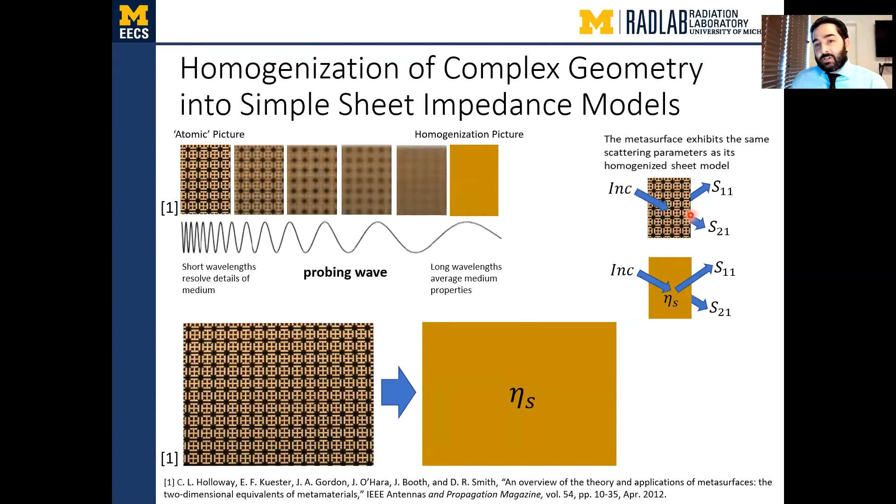So the key to that is that the patterned surface and the homogenized sheet share the same S parameters. So what do those S parameters look like? How do you go back and forth from the sheet parameters and the S parameters themselves? Well, in general, if you have a bi-anisotropic sheet boundary, it can support both electric and magnetic currents, and both the electric and magnetic field can excite electric and magnetic currents.

That's described by this matrix equation here, this boundary condition in general. So to get to S parameters from your sheet parameters, which include the electrical admittance, you have the magnetoelectric and electromagnetic coupling terms, and the magnetic impedance. From those terms to the S parameters, you use this equation here. And if you need to go to the material parameters from the S parameters, you can use this equation down here. These equations are for the general case of infinite homogeneous bi-anisotropic sheet boundaries, which are assumed to be infinitely thin.

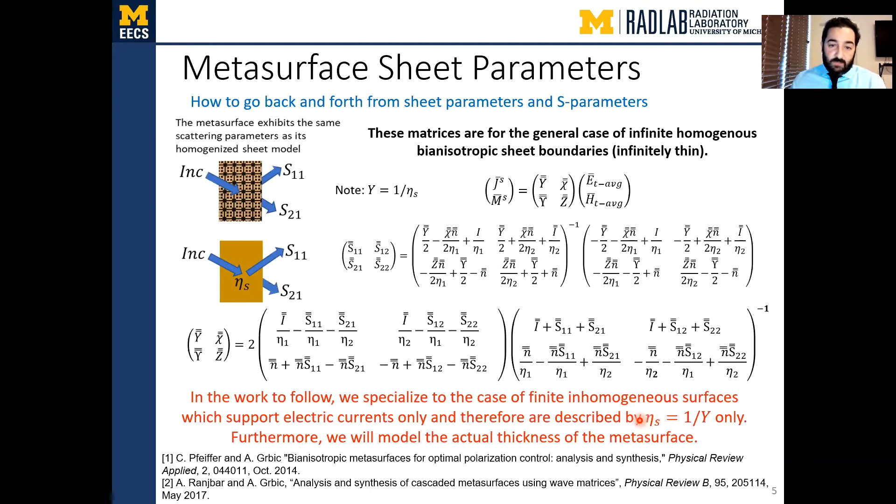In this work, what we're going to do is specialize to the case of a finite inhomogeneous surface, and we're also going to further specialize it to ones that support electric currents only, and therefore can be described by a single parameter, which is this admittance matrix. The inverse of that admittance matrix we're going to call the electric impedance. Furthermore, we will model the actual thickness of the metasurface itself.

So how do we do that? If we're only supporting electric currents, then our boundary condition here collapses into a single equation, the impedance boundary condition. We're only supporting electric currents, and we only have electric fields that excite those electric currents. Therefore, we can describe the metasurface through a single parameter called the admittance matrix, or the impedance matrix if we take the inverse of it.

So our metasurfaces in the beginning of the work will be two-dimensional in the sense that they do not vary in and out of the page. This metasurface here is a patterned metallic cladding over a single dielectric spacer and a grounded dielectric, or rather, the ground plane underneath. That geometry does not vary in and out of the page.

So we're going to do exactly what we just mentioned. We're going to take each of these patterned cladding elements, and we're going to homogenize them and assign to them a single impedance, which is representative of the average response that element would provide. That is called homogenization.

So once we have a homogenized sheet, which is basically an array of homogeneous impedance sheets, we can use this boundary condition to describe its response to a given electric field, or the currents that are excited by a given electric field through its impedance.

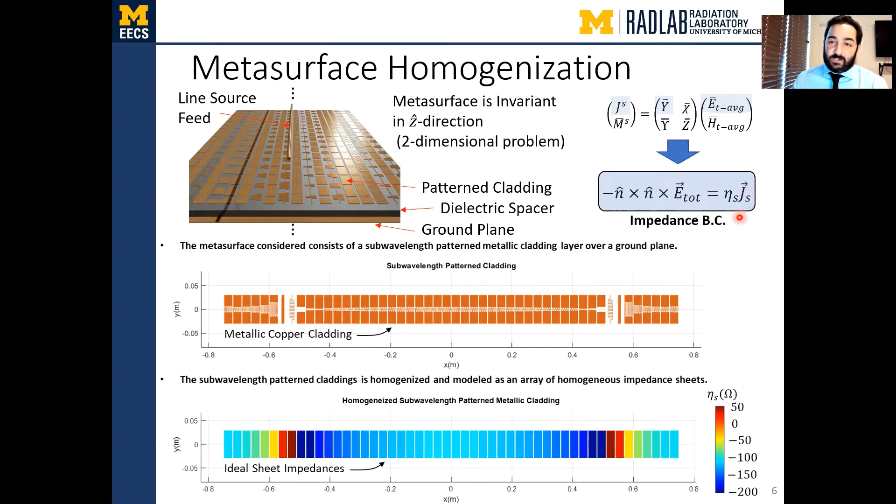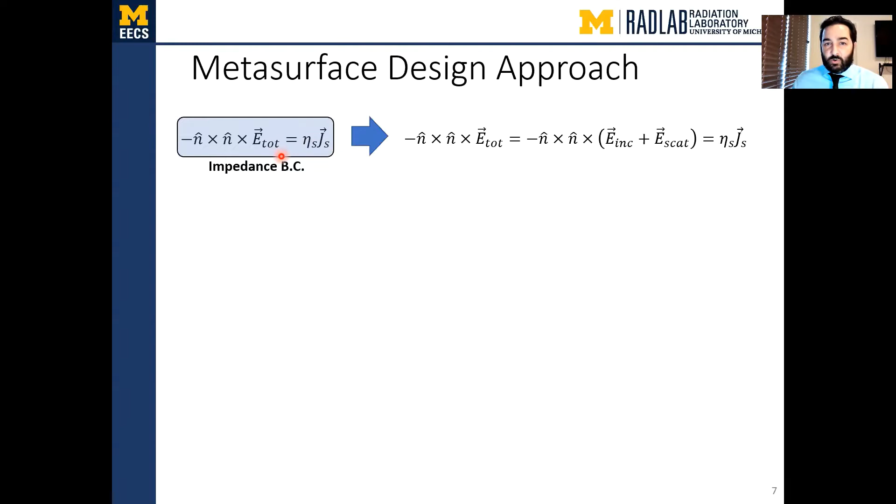So how are we going to design it given this boundary condition? Well, we're going to construct an integral equation around this boundary condition. So if we split the total field into incident and scattered, we can write the following equations.

So we can stipulate the desired scattered electric field. Typically, we know the incident field because we're going to excite the surface that we're trying to engineer the response of, and the scattered field is what we want to provide or produce. So we can specify the scattered field and stipulate it. If we stipulate the scattered field and we know the incident field, then we know the total field. That means we know the left-hand side.

Step 2: we're going to express the scattered field in terms of surface currents through an integral equation. So we're going to express the scattered field in terms of the integral equation shown here, which is the convolution of the Green's function with the current density.

Step 3, we're going to solve for those currents which satisfy the equality using the method of moments paradigm. We'll expand the unknown current density in terms of known basis functions underneath the integral sign, and recast this integral equation into a matrix equation, solve that matrix equation, and obtain the unknown currents.

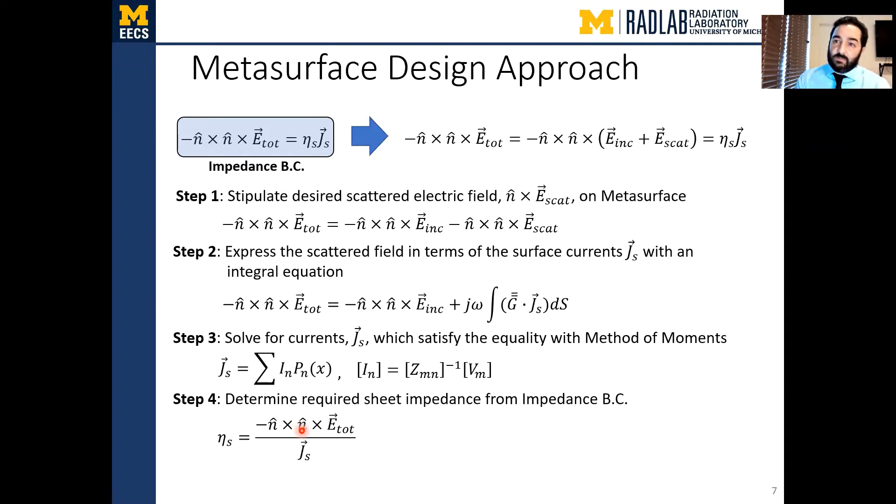Step 4, we'll return to this impedance boundary condition once we know the currents and the desired total field that we stipulated the scattered field component of, and we can solve for the sheet impedance that's required to achieve the transformation that's desired. So we'll outline the 4 steps in the following slides.

Step 1, we said we have to determine the desired total field. As I was alluding to, we know the incident field, its magnitude and phase, if we write it in polar form. And we stipulate the scattered field phase. We want to collimate the beam, let's say. But we don't know the amplitude.

The way we can find the amplitude is we can attempt to satisfy local power density conservation at the surface. So what we do is we set the incident power density equal to the negative of the scattered power density locally at each point along the surface. What we're trying to do there is say that the power that comes into the metasurface locally at each point is therefore reflected, and the hope is that we would get a passive metasurface in doing that.

So that's how we come up with the amplitude. We satisfy local power density conservation at each point along the metasurface, and we can derive a formula to give us the unknown amplitude. So we stipulate the phase, we derive the amplitude based on conservation of power, and then we have our desired total field, which is one key step in designing metasurfaces.

In step 2, we formulate the integral equation. Now we know the left-hand side, and we're going to formulate an integral equation around it. So we split the total field into incident and scattered, and then we throw the scattered field term to the right-hand side, and we construct an integral equation out of that. We express the scattered field in terms of an integral of the Green's function and the current density.

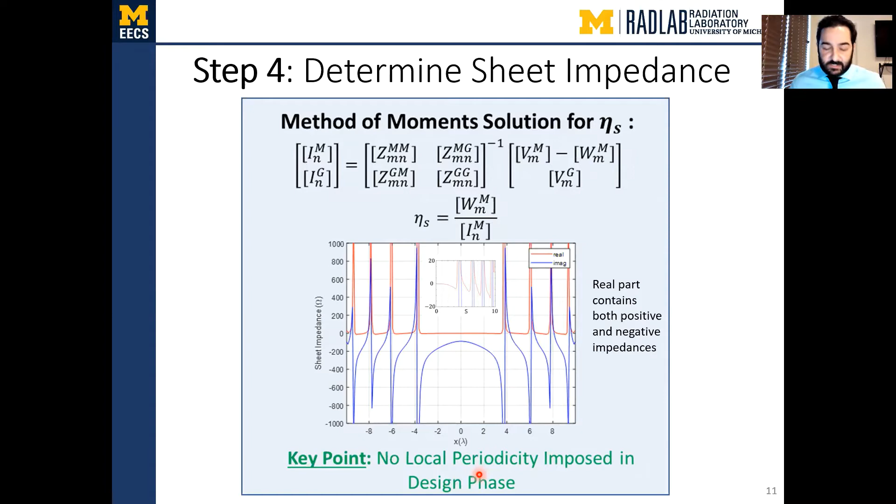So one key point here, though, is we did not assume local periodicity anywhere in the design phase, which is sometimes common in reflect array designs and things. We did the full coupling matrix between all the elements.

So for example, if we have a 20 lambda wide metasurface, which is separated from the ground plane by lambda by 10, and we feed it with a line source, in and out of the page, which is 10 lambda up, at 1 gigahertz, we get the following results.

So we have the incident field, which is a cylindrical wave coming from the line source, and we want that cylindrical wave to transform to a perfect plane wave. So we design this metasurface, which will have this sheet impedance shown in this figure. If we pattern this metasurface such that it can exhibit this complex sheet impedance, then we would get exactly the scattered field phase of a plane wave. We get a scattered plane wave, and that's the idea.

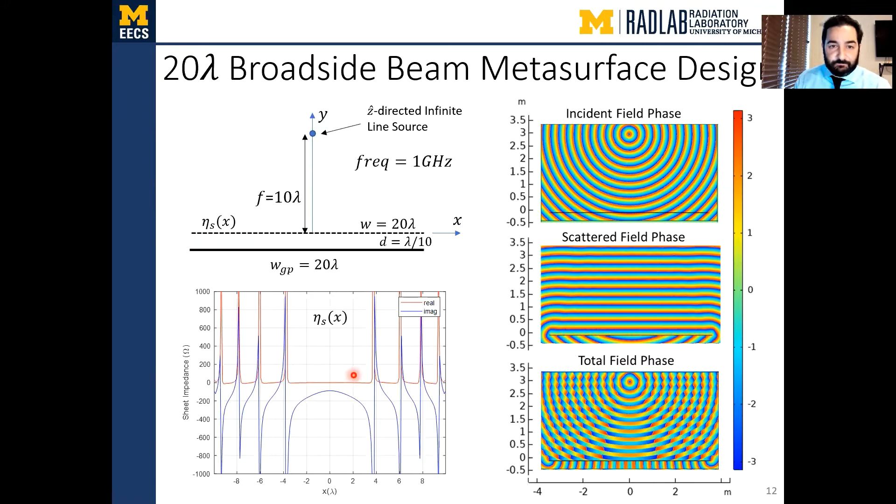But the problem is that the sheet impedance required is complex. So we have to find a way to, well, first we have to understand why it's complex. Where did the real part come from?

So we revisit step one to determine the desired total field. In that step, we said that the total field is the incident plus the scattered, and we knew the incident field by knowing what source we're using, and we stipulated the scattered field phase, and we didn't know the scattered field amplitude. We tried to do conservation of local power density at each point on the surface in order to find this amplitude.

If we expand the power density along the surface, then we can calculate that as one half real part of E cross H conjugate, and we know that both fields exist on the metasurface simultaneously, the incident and the scattered field. If you expand this cross product, you will get three terms.

You'll get the power density associated with the incident field, you'll get the power density associated with the scattered field, and you'll get this other term with the cross products, the mixing terms, which is due to the interference of the incident and the scattered field. So you have E incident cross H scattered conjugate and E scattered cross H incident conjugate.

So what does that look like? We know by design that the incident power density is equal to the negative of the scattered power density, so both these cancel by design. That's how we found the amplitude. We found this amplitude such that it generates a scattered power density equal to the negative of the incident. So these two cancel by design.

This term is left over. And the whole idea is to set this equal to zero so that we get a passive metasurface. If you look at this plot here, I have the incident power density in blue, the scattered power density in red.

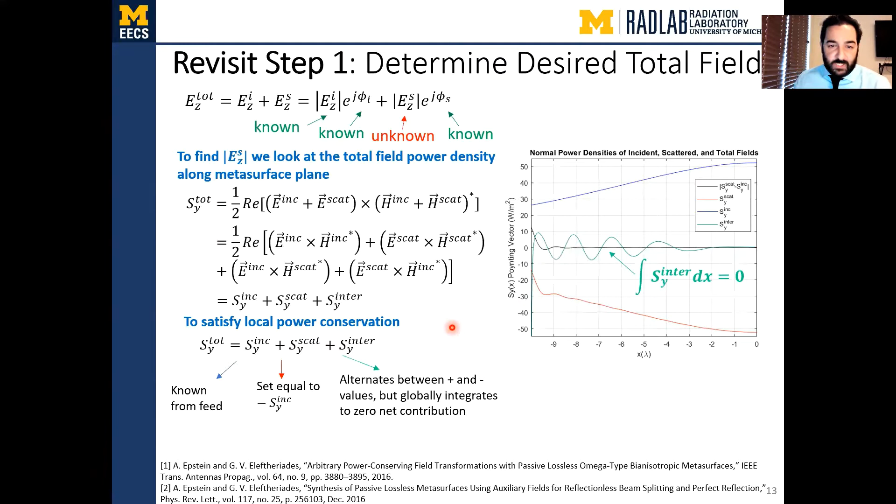So thus setting S incident equal to negative SY scattered led to global power conservation because this integrates to zero, but not local. What we could do is take some of this power, find a way to shuttle the power from points where there's positive power needed to points where there is negative power needed, using surface waves. That's what we'll do. That's the main theme of our solution. These designs are therefore called non-local power conservation designs.

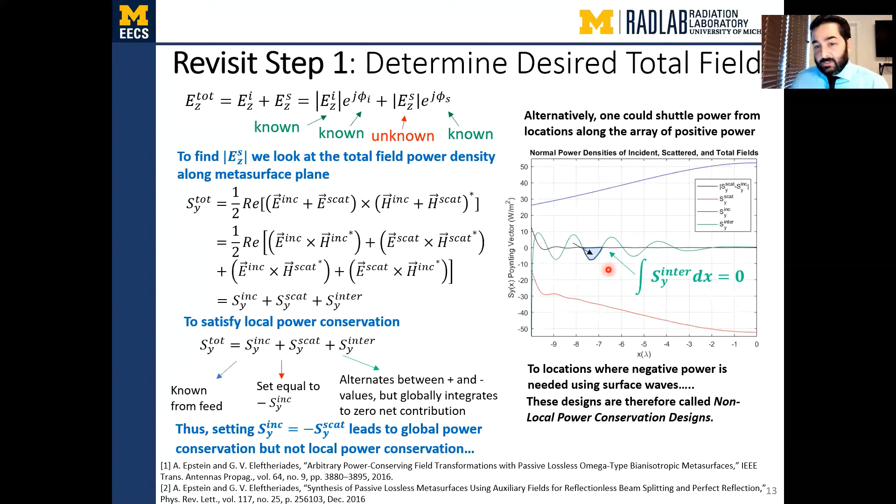So let's see what the effect of this interference term, this power density interference term, has on the sheet impedances that you obtain. Here what I've shown is the sheet impedance that we derived.

If we zoom in to the y-axis, we can see how the real part, the red curve, has equal positive and negative contributions. If we superimpose that over the power density, we see that points of negative power density, indicating we need active devices to synthesize that negative power, have negative resistances, which is indicative of the necessity for gain. When we have positive power density, we need to absorb the power, and that means we need positive resistances. So you can see they line up pretty well.

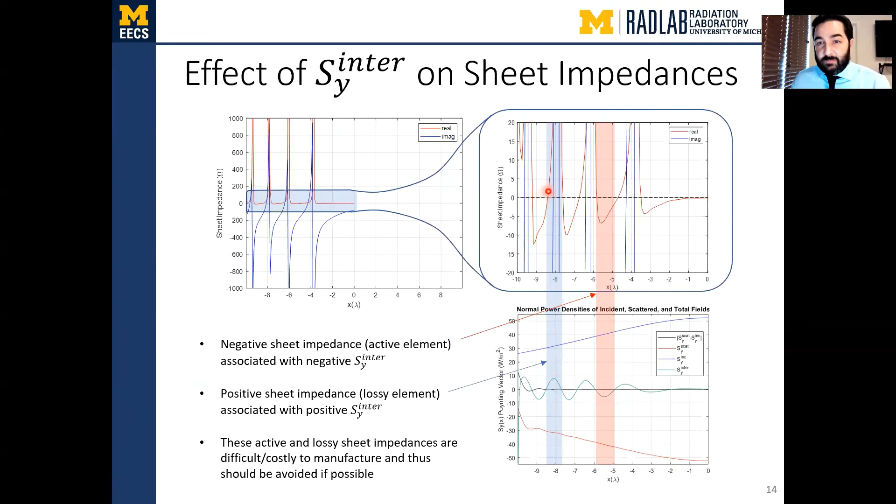So what is our strategy? What are we going to do to obtain purely reactive metasurfaces and get rid of this real part? We're going to use gradient descent optimization, and we're going to try to obtain a purely reactive metasurface, consisting of only reactances, that will give us the desired transformation and therefore will not need any lossy or active surfaces. So the main idea is to throw out the real part of the sheet impedances and search for a reactive sheet which gives the same near fields as the complex sheet.

How is this going to work? What is the main idea? The main idea is to engineer a certain number of surface waves that we add to the desired scattered field and the known incident field, such that the total field at each point along the surface satisfies local power density conservation. These additional surface waves, which we'll engineer the surface to support and excite, are not going to contribute to the scattered field because they are evanescent.

So we're going to look for a surface, for the sheet impedance that describes a reactive surface, that generates the correct number of surface waves, such that when we add them to the desired scattered field we want to achieve upon reflection, and the known incident field, that total field satisfies local power density conservation. So we're adding another field, and that additional field will not radiate to the far field because it's evanescent, and that additional field will allow us to achieve passivity.

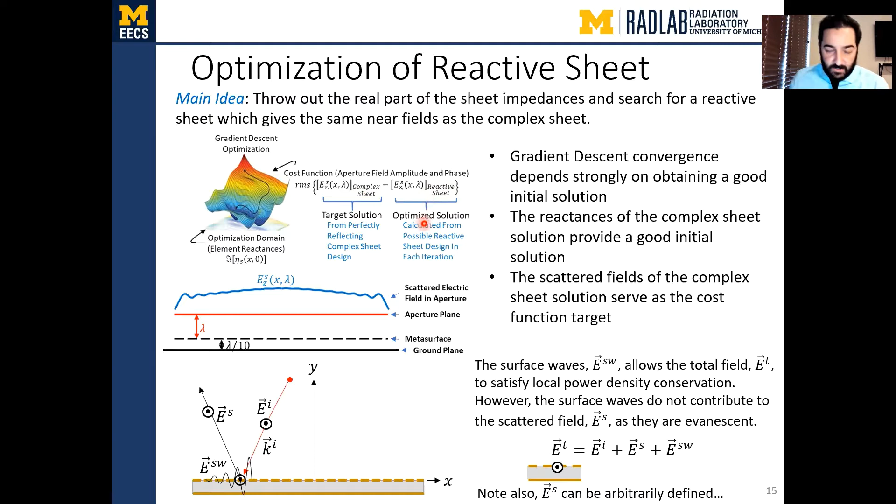Okay, so the optimization results are shown here. We have the original complex valued sheet as the black curve, and the reactive sheet. Reactive means I threw out the real part and immediately solved for the response of the reactive sheet without optimizing it. So we can see what happens when we remove the real part. We get the red curve, which is a different near field. This is a near field amplitude at a plane 1 lambda above the metasurface, and the near field phase.

Then we optimize that reactive sheet in order to make the near fields equal, and you'll see the blue curve. The blue and the black curve agree pretty well, meaning that we were able to find a reactive sheet which gave us the same scattered near fields as the complex sheet.

And what we have here is what happened to the impedances. So remember, we started with this complex sheet, which had both real and imaginary parts. And we found an optimized reactive sheet, which is purely imaginary. The real part is 0. But our reactances have become perturbed in such a way that we've excited those surface waves that will bounce back and forth between the open ends of the metasurface and give us that additional field needed at each point, such that we can get passive metasurfaces. We'll see that the patterns of the optimized reactive sheet agree well with the original complex sheet.

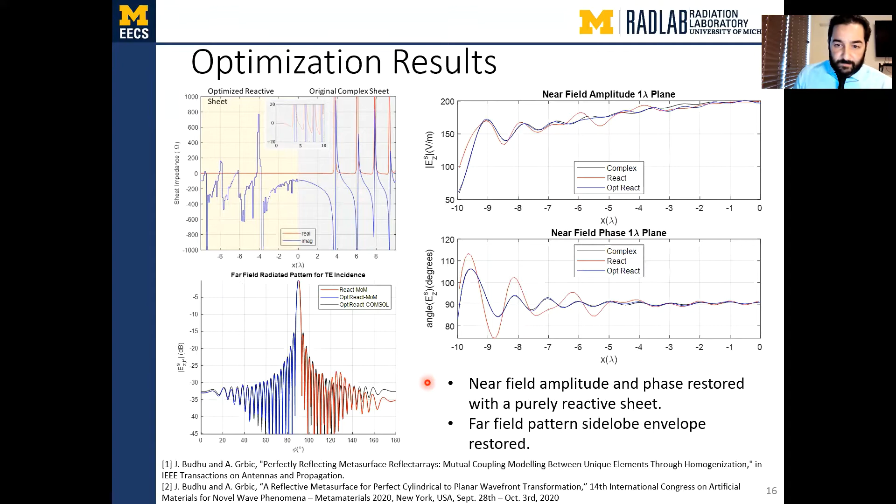Okay. So let's see what the surface waves look like.

So we wanted to realize this. We came up with a library of pattern geometries that we could use to realize the reactances we optimized. We have an interdigitated capacitor, a meander line inductor, a gap capacitor, and a transmission line inductor, or straight line inductor, which are the classic parts used for reactive elements.

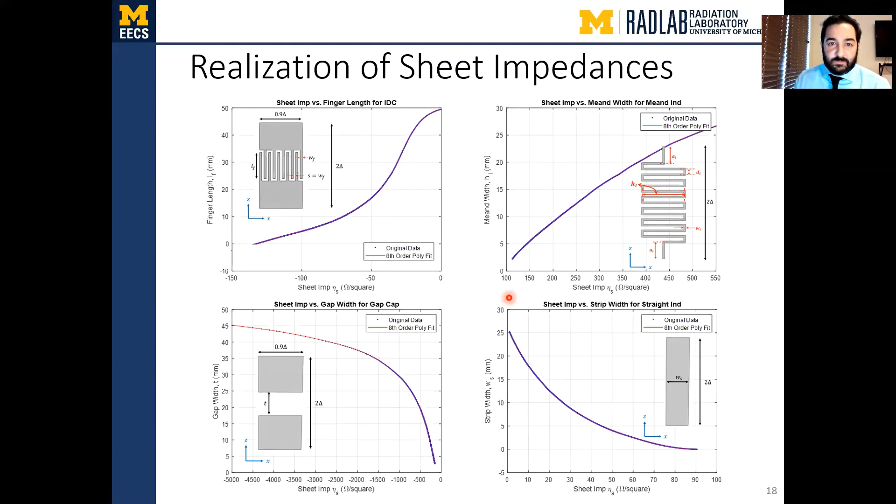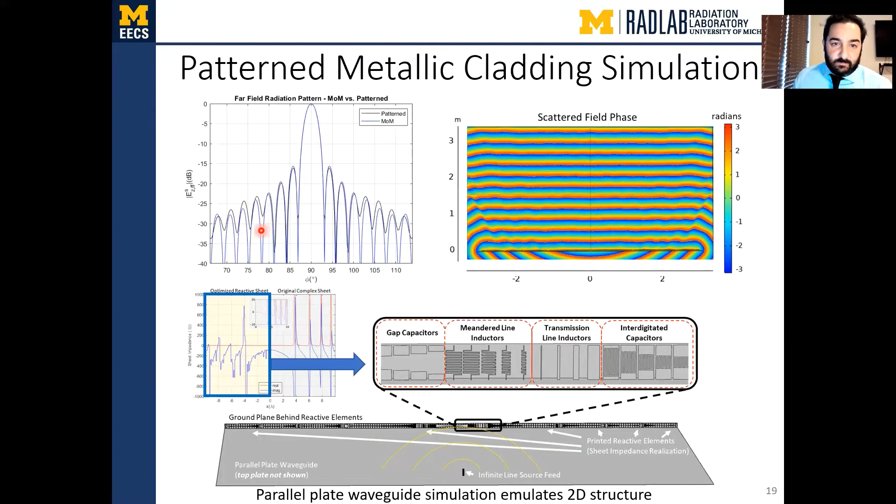We then patterned this metasurface using this optimized reactive sheet. We placed it between two parallel plates in order to emulate an infinite structure in the vertical direction, making it a two-dimensional problem, and simulated that in COMSOL using full wave simulation. We got very good patterns. So the patterning of this optimized reactive sheet can be realized using these types of geometries, and then we can realize these optimized reactive sheets.

So then we wanted to see if we can push this idea and get dual band operation. The way to get dual band operation, we have to add some degrees of freedom. So what we're going to present next is multi-layer metasurfaces for dual band operation.

So I'm adding another metasurface. We have the pattern metallic cladding over a grounded dielectric, and then another pattern metallic cladding over a dielectric spacer. So there are 5 layers in total: two metasurfaces, two dielectric spacers, and one ground plane, and we'll get dual band operation out of this.

To understand how that works, we look at the following figure. The total field is still incident plus scattered, but now we're going to look at two different frequencies. We stipulate the phase again, and find the amplitude using local power density conservation, matching the local power density again. In the previous example, we had a metasurface over a ground plane, and the ground plane has a known total field and a known impedance, both 0.

The metasurface, the total field and the impedance of the metasurface are linked by the boundary condition that we're using to do the design. So the idea is this: what if we make layer 2, instead of a ground plane, we make it a metasurface? So now we have two metasurfaces.

The same situation for the top layer, but the bottom layer now has a total field and an impedance which are unknown. They are linked by the same boundary condition, but we can't specify the total field on the bottom layer, because we can only specify the total field on the upper layer since we want the desired patterns, the desired reflection characteristic, or the desired radiation due to the currents on this surface. It's due to the currents on both surfaces, but the radiation is going out this way basically. So we can specify the total field we desire here, which will give us the pattern. Down here, this contributes, but only in totality. Okay, so that's the idea.

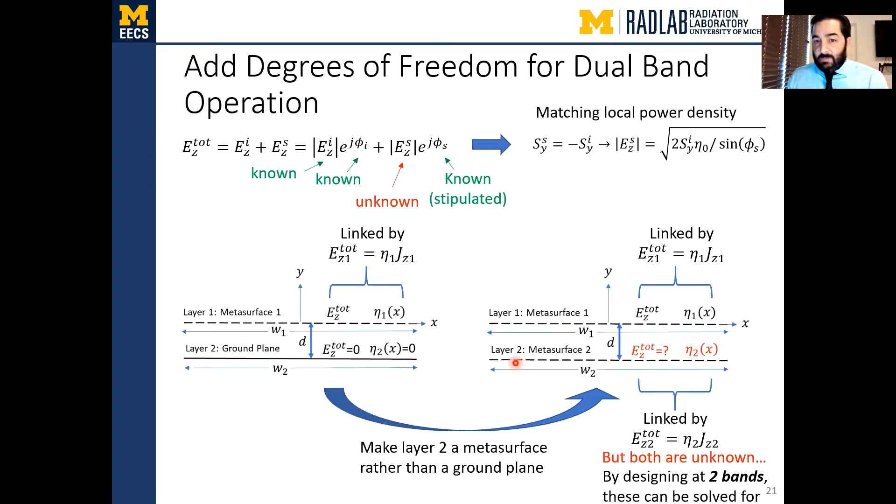We're going to make the bottom layer a metasurface, but we have the problem that we need to solve for this total field down here. So the way we do that is the following. If we go back, let me see here.

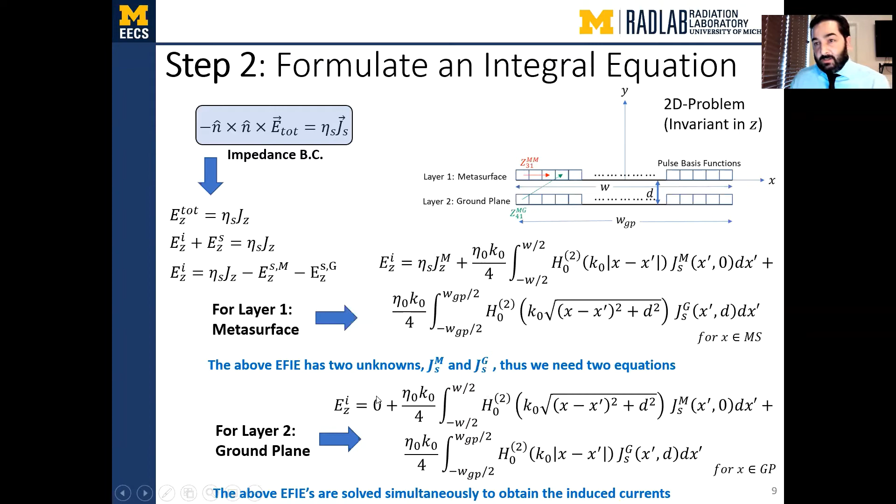If we go back, what we did before is we had the situation of a ground plane and a metasurface, and we constructed these two integral equations around them. We had the total field here, which had the sheet impedance of the metasurface, and we had the known total field on the bottom layer, the ground plane, as 0, because it was PEC. We constructed this integral equation, or this matrix equation, out of that right here. So remember this matrix equation, because it's going to be very similar.

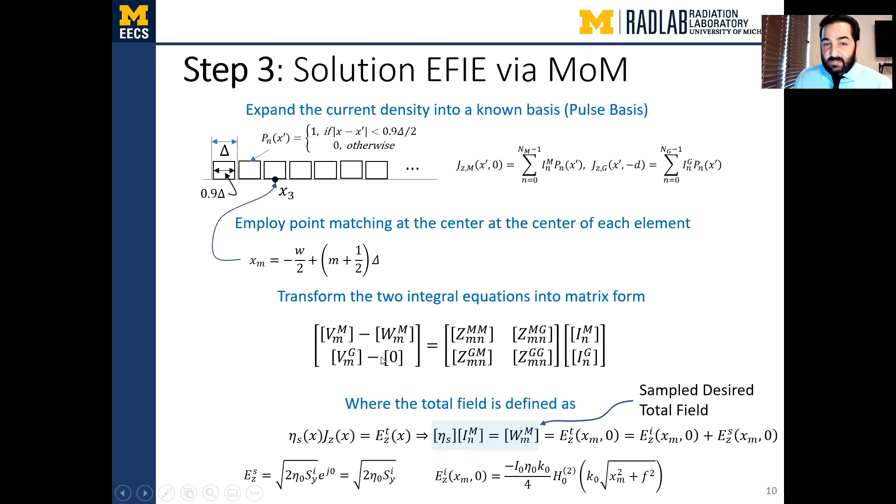But instead of having 0 field here, we're going to have a contribution. So if we go back, we have this same matrix equation here. We have the total field appearing on the left on the upper surface, but instead of having the total field of 0, we now have a sheet impedance, an unknown sheet impedance of that bottom layer multiplied by the current density. This causes a problem because we don't know the sheet impedance, and we don't know the total field that we could have thrown to the other side.

Additionally, we have this same matrix at both frequencies. You'll see a superscript of F1 meaning frequency 1, and F2 for frequency 2. So we have to solve both these matrix equations simultaneously. We came up with a pretty clever way to do that, and after some thinking about it, I'll try to walk you through our approach here.

So we make an initial guess of eta 2. We make the initial guess of 0. If I guess this to be 0 at first, then I know all of the elements of this matrix and I can solve for these currents. So we make an initial guess of 0, then we solve for the currents by inverting the matrix, same as we did before.

Once this is known, we can use the same approach as before. Then we obtain the sheet impedance, same as we did before. Once we know the currents and we know the desired total field in the uppermost layer, once we know the total field specified on that uppermost layer and we solve for the currents, then we can obtain the sheet impedance of that layer.

And the trick is to use the known frequency scaling laws for impedances. If I know impedances at one frequency, then by frequency scaling for reactances I know what that impedance is at the next frequency. So we can scale eta 1, the sheet impedance of this upper layer, the reactances, to the new frequency F2 using known 1 over j omega C and j omega L. That means we know the sheet impedance on the uppermost layer at frequency 2.

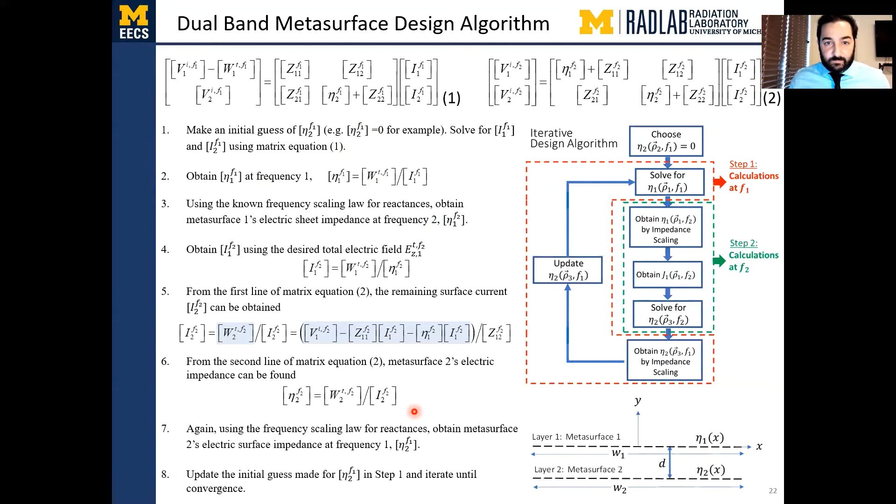So that was for 2 metasurfaces. Adding dielectrics and a ground plane adds no new unknowns, because the impedance of the dielectrics and the ground plane is known. So it's directly applicable - it's the same exact algorithm that you can apply to a stack like this.

So the difference is the integral equation now has five integrals in it, right? So I'll walk you through how these are built up.

Same boundary condition: if we're observing on the uppermost layer only first, then we have the incident field equal to the total field plus the scattered field due to the currents on the metasurface, which are electric surface currents, plus the scattered field due to the volumetric currents in the first dielectric, plus the scattered field due to the electric surface currents on metasurface 2, the scattered field due to the polarization currents in the second dielectric, and then the scattered field due to electric currents on the ground plane. So this one integral equation is for observations made on layer 1.

And it's exactly the same as before - we only have this one unknown sheet impedance there, right?

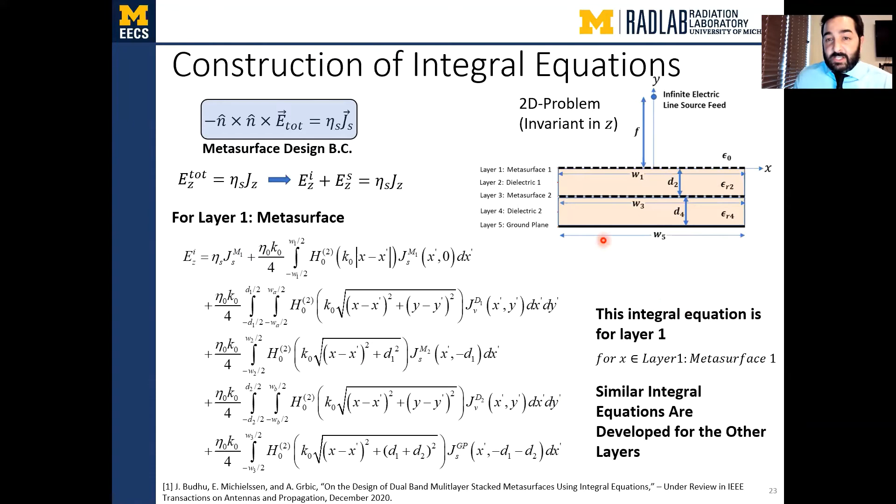Similarly, we can develop another set of 4 integral equations for a total of 5 for observations made in each of the additional layers.

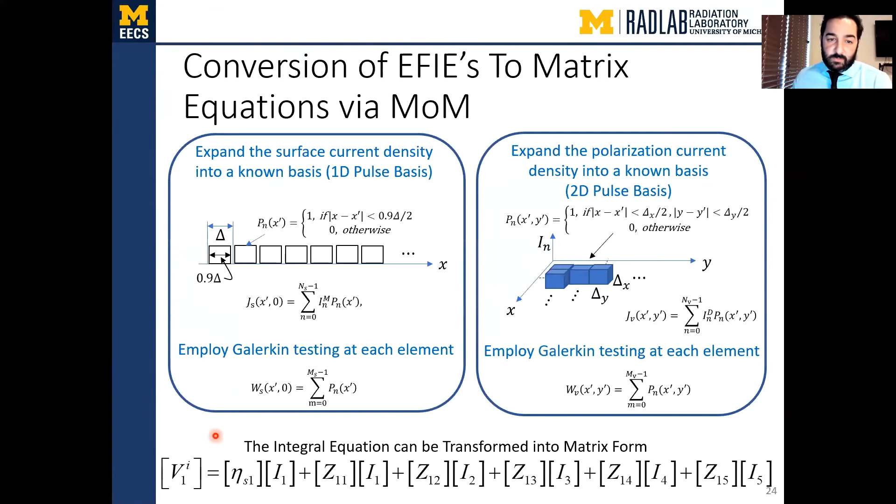So for that integral equation that we constructed for the uppermost layer, we use the method of moments scheme. We expand into pulse basis functions on the surfaces, and 2-dimensional or volumetric pulse basis functions for the polarization currents in the dielectric. We use a Galerkin testing scheme, and we can convert that integral equation to a matrix equation like this. Doing the same thing for the additional layers gives you a total of 5 of these matrix equations.

We can write these in a block matrix form. Because we know the impedance of the dielectrics, eta V2 and eta V4, as 1 over j omega epsilon naught into epsilon r minus 1 from the volume equivalence principle, these are known values.

We can express the surface impedance of the uppermost layer in terms of the desired total field again, as we did in the 2-layer example. The only unknown will then be eta sheet 3.

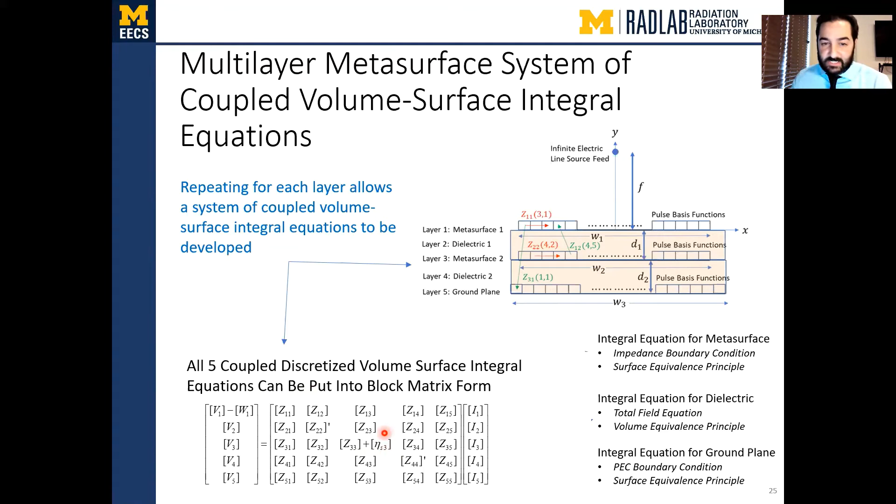So we can express this matrix like this, where I've included the primes because these have absorbed the volumetric impedances of the dielectrics. Then I moved the uppermost impedance to the left, like we did before. So the only unknown here is eta sheet 3, and now we can use the exact same algorithm to solve that - we guess eta sheet 3 and we iterate around to get the solution.

So we're now going to optimize. If you do that, you'll get a complex sheet impedance, and we need to optimize them using the same approach in order to obtain purely reactive sheets.

And the way we'll do that is by the same gradient descent algorithm. The only difference now is the cost function has 2 frequencies in it, 2 responses - we want the desired response at both frequencies.

So we're only looking at the far field amplitude now. Previously, we were looking at the near field amplitude and phase, but now we're looking at the far field pattern only. And we have the difference between the complex and reactive sheets for frequency 1, plus the arbitrary difference between the complex and reactive sheets for frequency 2.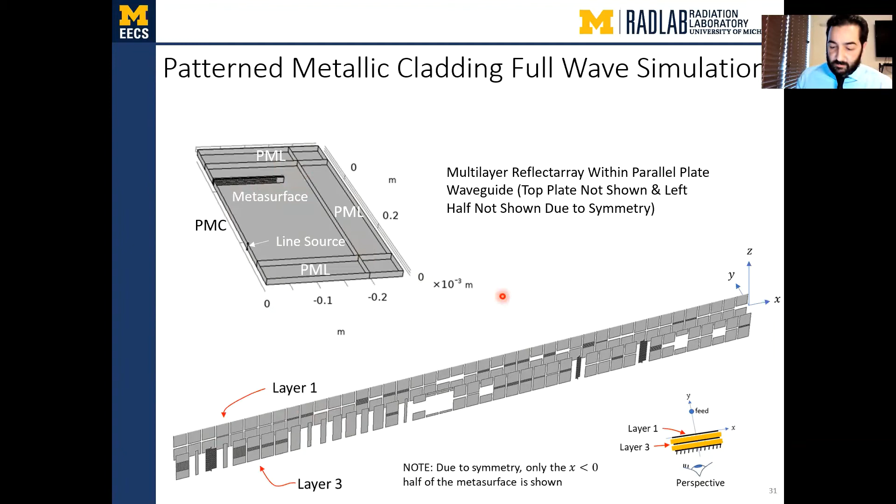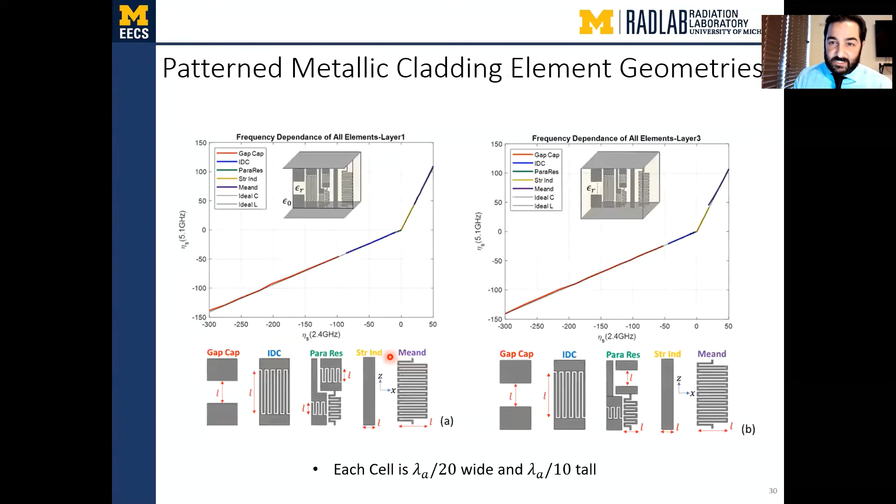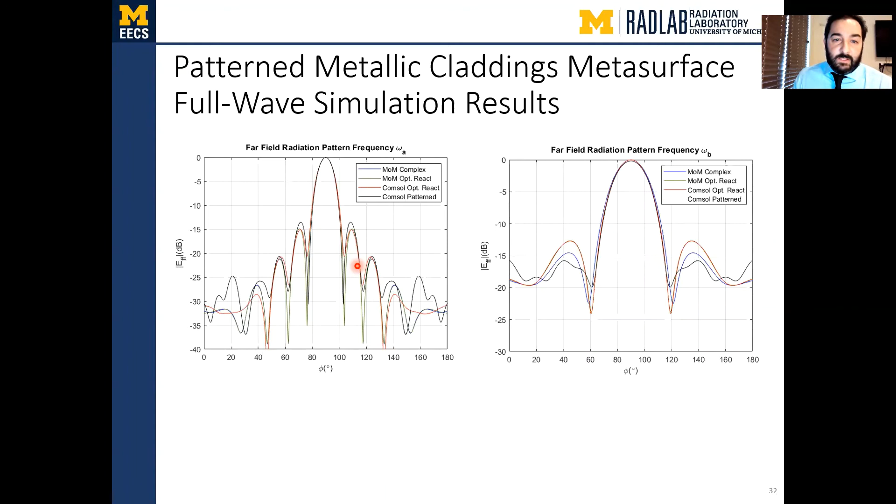So we did one more example to show this can be pushed to a bit more of an extreme case. We have one beam at 35.75 gigahertz, and another beam at 13.4 gigahertz that's scanned off broadside. Using the same exact approach, we have the complex sheet impedance here and here. We optimized out the real part, kept only the reactances, obtained a purely reactive sheet, which gives us these patterns.

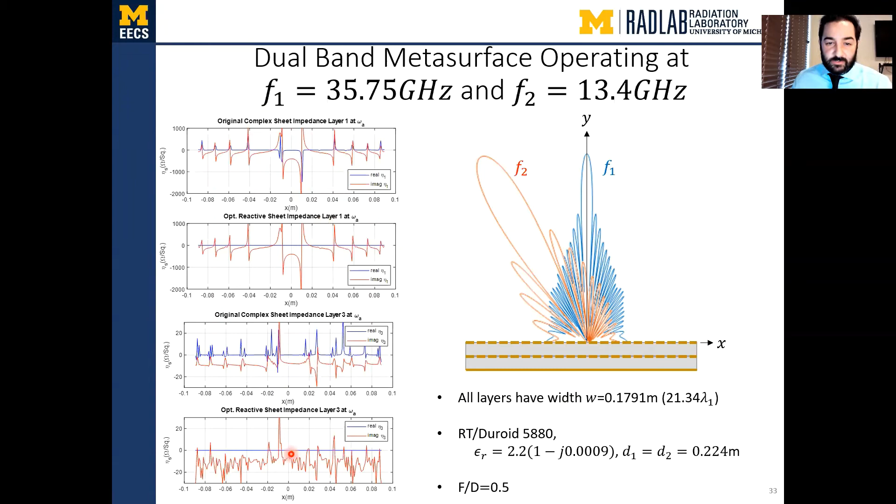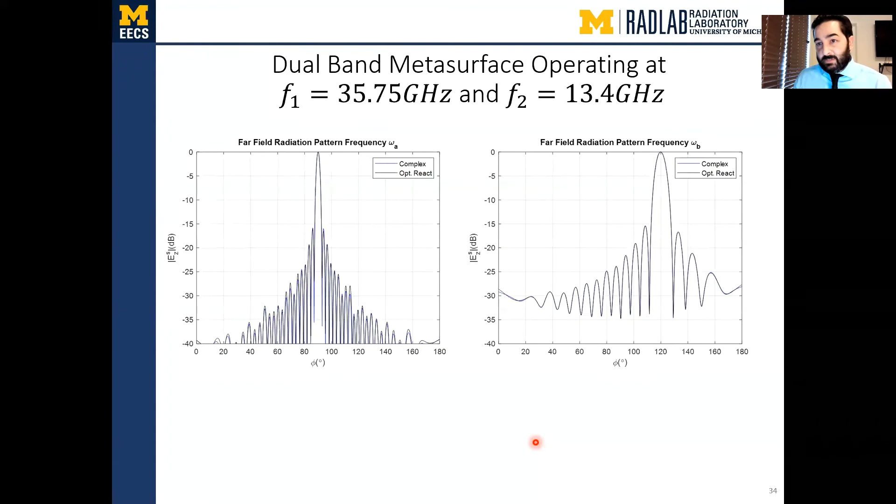Those impedances are shown here and here, and you'll notice the blue line is at zero. The pattern agreement is excellent. So the complex and the optimized reactive sheets give you the same patterns, but there's a lot of evanescent contribution that the optimized reactive sheet generates in order to obtain that.

So now we were getting pretty excited about this work, and we thought maybe we could push it a little bit further. So let me go back.

If I go back, what we were doing the whole time was stipulating the phase, and we were solving for the amplitude that we needed that satisfied local power density conservation, or that we thought would. So we were stipulating the phase only and solving for the amplitude.

But what we want to do now is stipulate the phase and the amplitude. And if we stipulate both the phase and the amplitude, then we're doing arbitrary beamforming with a single pattern metal layer over a dielectric substrate. So we're asking ourselves, can the surface waves be used to achieve more drastic and arbitrary power density transformations?

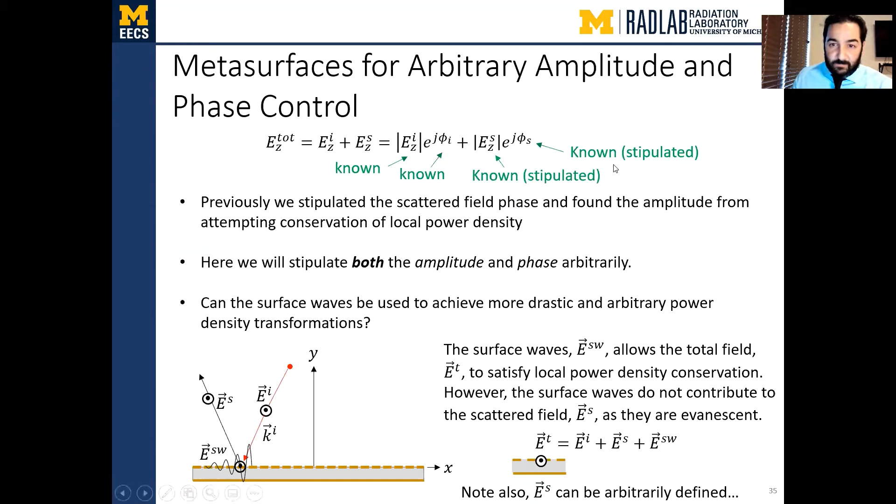So now, knowing the feed, we're going to stipulate both the amplitude and phase, which means we can do beamforming, we can do arbitrary pattern generation. So we're going to see if that works.

So we're going to optimize the metasurface to get these surface waves. For each of the examples I'm about to show you, they are 16 lambda naught wide, on a Rogers 6010 substrate that's 1.27 millimeters thick, and they're all operating at 10 gigahertz. We only have one frequency here, so there's only one metasurface, and we're doing everything at one frequency, but now we're specifying amplitude and phase. And we have the difference in the complex sheet and the reactive sheet.

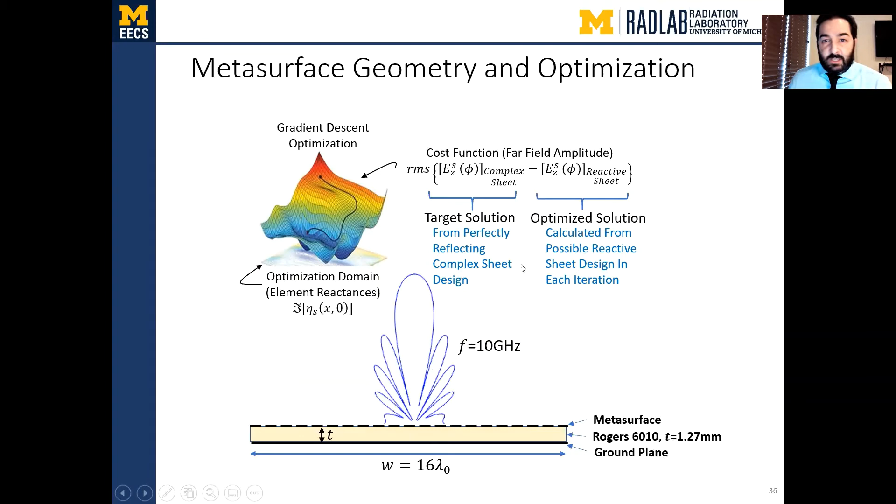So as an example, the first example, we have a scanned beam. We're going to scan the beam 30 degrees off broadside, and we're going to force the side lobe levels to be below minus 20 dB using a Taylor aperture distribution. So this is what we're doing.

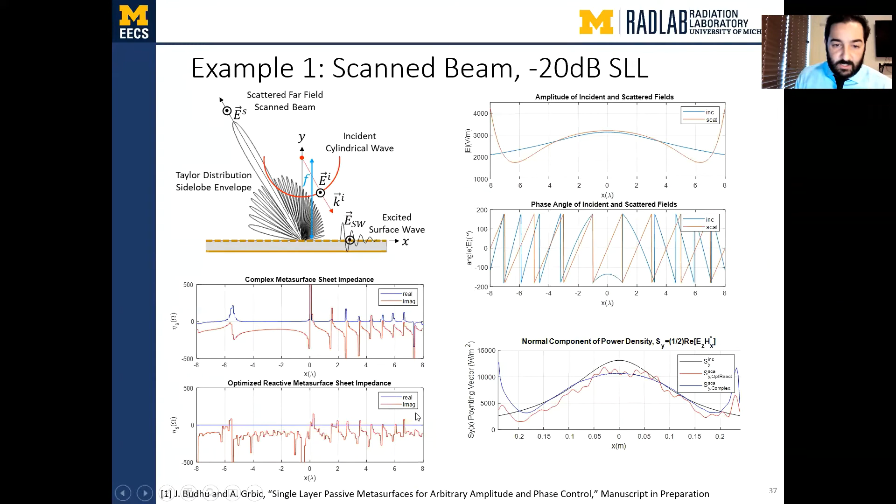We had a complex and optimized reactive sheet, and we back-projected these far fields to the near field, to the metasurface plane, to see if we were also shaping the near field. And we were. So we have the optimized near field amplitude and near field phase for both complex and optimized reactive sheets. We're building the cost function around the far field amplitude only, which allows us to do the optimization a bit easier, but that's also inherently shaping the near field amplitude and phase as well.

And if we look at the spectrum, same as we've been doing, we see that the complex sheet has very little evanescent contribution and no surface waves. Then the optimized reactive sheet has a lot of evanescent content, and that content generates the surface waves that we need in order to achieve this transformation.

If we zoom into the visible region only, plotting from -1 to +1 k naught, you see that we get the same radiative near field and therefore far field, but we have different invisible spectrum or evanescent fields.

As a second example, we wanted to take a cylindrical wave and transform it into two beams. One beam goes off to 30 degrees off broadside, the other goes to 40 degrees off broadside, and both beams have -30 dB side lobe levels.

So what we have here is the cylindrical wave in blue, amplitude and phase, and we want to use the metasurface to transform that cylindrical wave into this amplitude and phase, which has the interference pattern between the two beams and this phase distribution with a kind of rectangular wave with a slant to it.

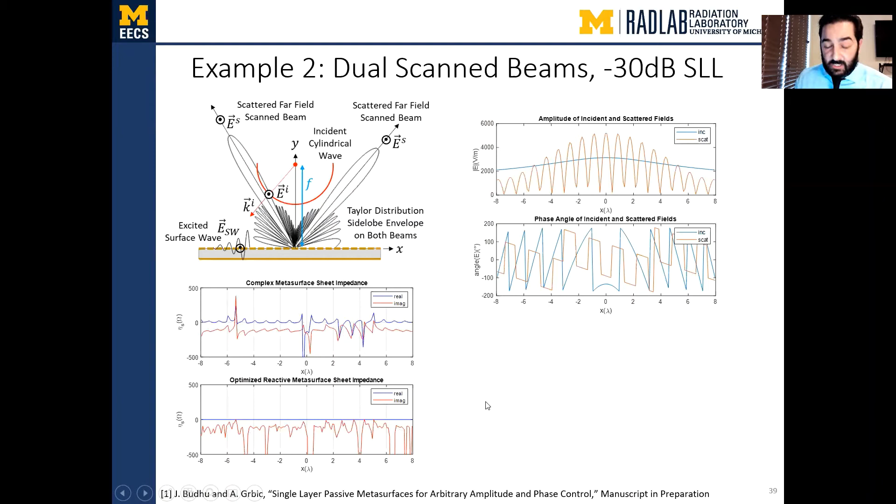So here's the complex metasurface, and here's the optimized reactive metasurface that we got, purely reactive. And here's the results - complex beam and optimized reactive beam, they both agree very well. Back project those beams back to the near field, and we got the desired response, the amplitude and phase at the aperture using the surface waves.

And if we look at the spectrum again, we have all this evanescent content, which is generated by the optimized reactive sheet in order to allow us to do this transformation, which is a completely arbitrarily specified amplitude and phase, meaning we can do beamforming with just a patterned surface.

Remember before at the beginning of the presentation, I showed you have to use multi-layer PCBs with ICs. In the case of a phased array, you have to shape a reflector, or you'd have to use multiple layers of a metasurface or those kind of technologies to get this kind of response.

But now we can specify arbitrarily the amplitude and phase of the far field pattern and also the near fields, and just pattern a surface, pattern a substrate, and we can get whatever beams we want out of it, really. And so the near fields are also correct - the visible region spectrum is also correct.

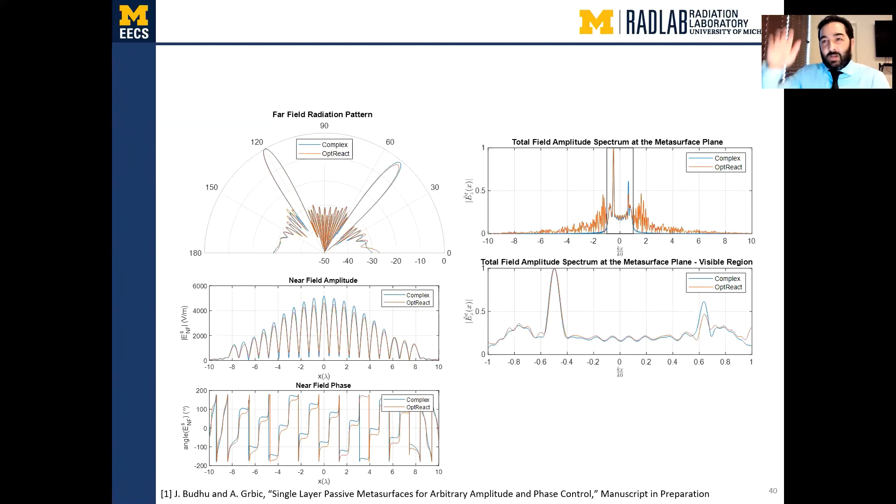So we kept feeding this thing with a source above the metasurface, which has volumetric requirements, right? So for metasurface antenna designs, we want to make everything compact. So this is another example where we now bring the feed into the substrate.

So we put the pin in the substrate, and it's an infinite line source in and out of the board. This thing will launch a certain incident field, which will interact with the metasurface, and that will generate some kind of desired field. So what we're doing here now is a compact metasurface antenna that has no volumetric requirements outside of the metasurface substrate.

And we want to make this cylindrical line source convert into a perfect aperture, which is uniform amplitude and phase. So here is the blue curve of the incident field amplitude, and the blue curve of the incident field phase. We want to transform that with the metasurface into a scattered field amplitude and phase which is uniform, indicative of perfect taper efficiency. So that's what we're trying to do here.

So this side lobe envelope will follow our sinc function with -13.4 dB side lobes, and we'll have that 1/x decay, indicative of a sinc function. So here's a complex metasurface sheet impedances.

One thing I might have left out is that when you design the complex metasurface, we specify this scattered field amplitude, right? But the scattered field amplitude - you know the distribution because it's related to the beam, but what is the absolute level? You know, this is 2,900 volts per meter. How do we find that?

Well, we match global power. So if you integrate the power density along the surface of this incident field, you'll have some number. If you integrate the power density of your scattered field along the surface, you'll get the global power of the scattered field. Those two have to be equal, because if you want it to be passive at the end, you want to have global power conservation.

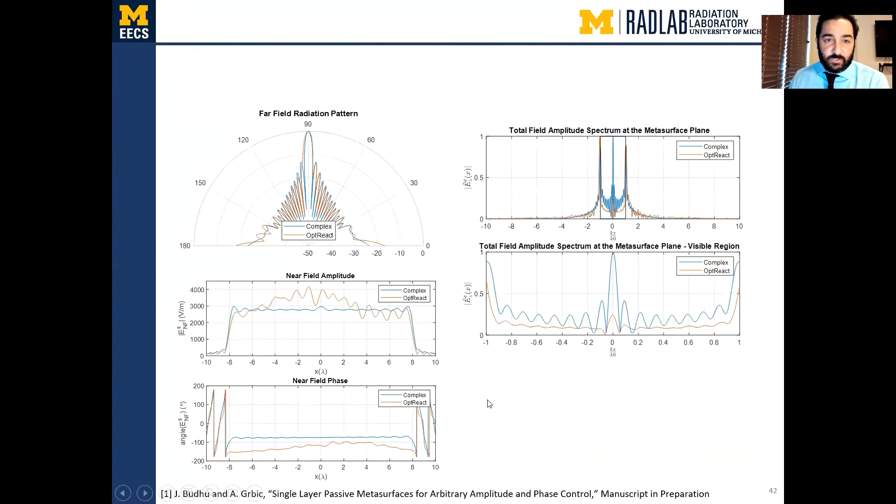So here are the results - these are still underway, right? They're still converging a little, but we're nearly there. So this one we have a broadside beam, with 13.4 dB sidelobes. Complex and optimized reactive sheet are agreeing pretty well. If you back project this back to near field, we're almost there in near field amplitude and phase.

If you look at the spectrum, we're almost synthesizing the total spectrum. It's still running, but it's nearly there.

One thing that's interesting to notice with this pin in the substrate is that the evanescent contribution to the complex sheet is significant. We have a lot of evanescent content in the complex sheet, because that pin in the substrate generates a lot of evanescent content by itself in the incident field, and the complex sheet therefore has some of this. So we're basically reshaping what we have there already. But this is looking very good.

Now we want to move to three-dimensional. Everything we did before was two-dimensional metasurfaces. We want to move to three-dimensional metasurfaces that are practical, and we also want to look at doing conformal metasurfaces. So the idea here is to combine all those topics that we just discussed.

We have an incident field, maybe a cosine Q, coming in at both frequency F1 and F2 on a conformal metasurface that's multi-layered, and get dual band responses out of it from conformal surfaces in 3D. So maybe at F1 we reflect it off in this direction, as a beam with arbitrarily defined amplitude and phase. It's beamforming with passive metasurfaces at two frequencies, or you could add additional frequencies, more layers, from conformal metasurfaces that are 3-dimensional. And then maybe this frequency scans off to that direction.

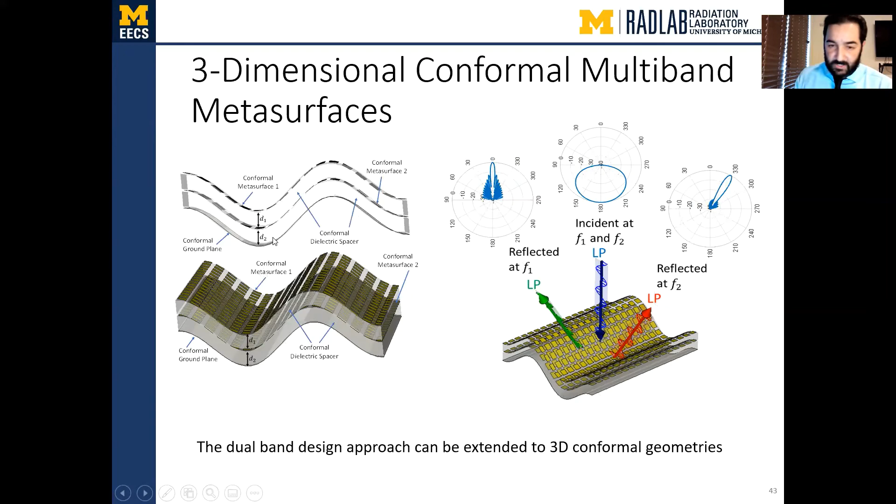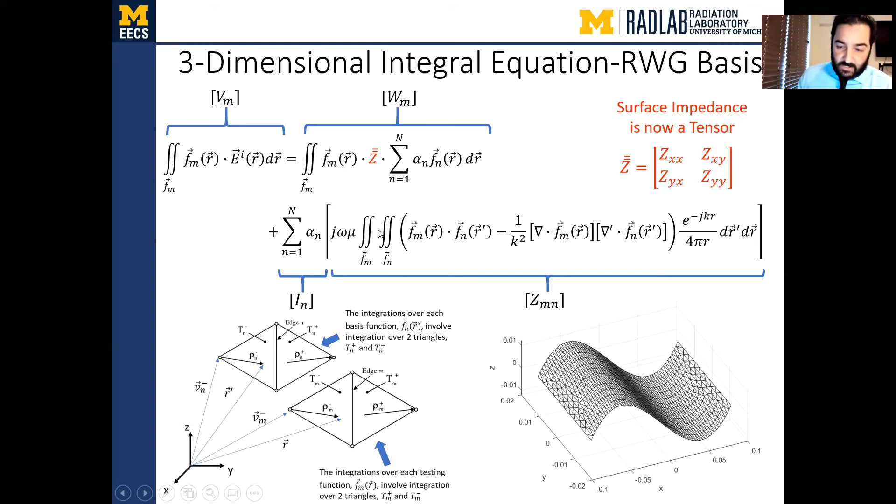Then you'll recognize this as our eta sheet, which is now a surface impedance tensor. It has both polarizations in it, X and Y. And then we have the inner product with the testing function, which is also an RWG basis. Then we have the current density, the current coefficients here, and the coupling matrix, or the impedance matrix from there. Using this, we were able to design this metasurface.

And this is pretty cool. Coming from a conformal surface that's 3-dimensional, we can design metasurfaces to give us arbitrary beamforming again from a conformal surface. So arbitrary surfaces, arbitrarily defined frequencies of separation, and arbitrarily defined patterns or responses that we want from it. So it's the most general thing.

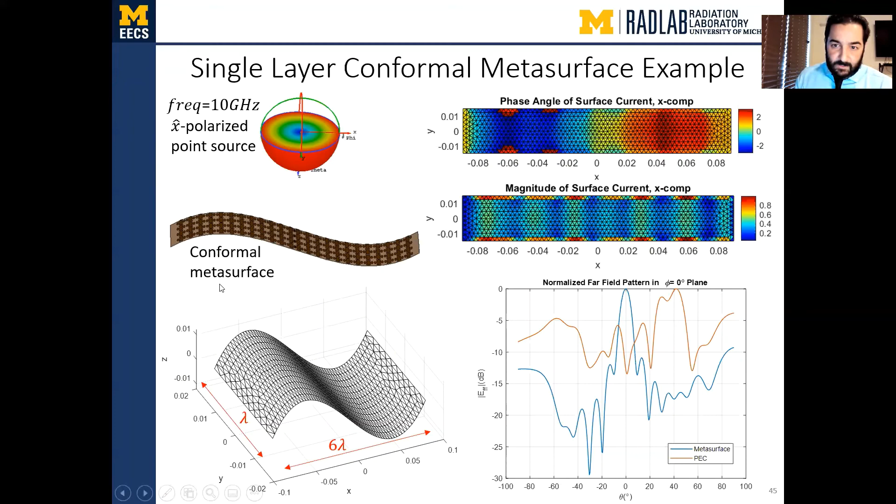So what we're doing now is using our same optimization codes to generate purely reactive sheets on conformal or arbitrarily defined surfaces, arbitrarily defined beams, at arbitrarily defined frequencies. Normally when you design something like a reflector array, for example, you have to pick your frequencies of separation F1, F2, such that you can design elements where they don't interfere with each other.

Normally you want to tune the response at one frequency without having to worry about the effect on the other frequency, so the other frequencies operate as background. Then you go back to this frequency and tune it independently without affecting the original.

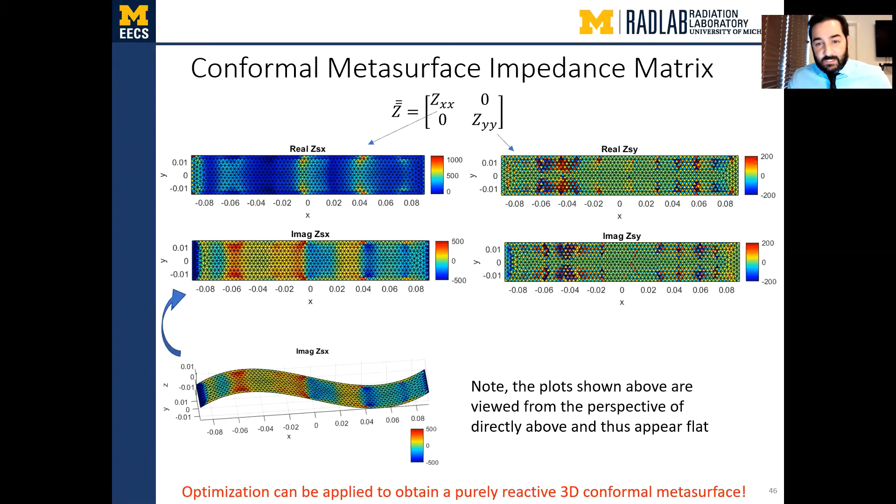But now, since we're designing both frequencies simultaneously with our iterative algorithm, we can define any frequency separation—arbitrary frequencies, arbitrary number of frequencies, arbitrary surfaces, arbitrary beams, basically everything we want. That's the result we got. So we're still working on that kind of thing.

And arbitrary beamforming with it—I can get a substrate from Rogers and just etch it with a pattern I engineer, and get arbitrary beamforming out of it, which is much different than a phased array, where I'd have to put ICs on the back, have excitation coefficients, amplitude and phase for every element, or shape some reflector and get it manufactured.

Difficult to do that, to manufacture a shaped reflector, or multiple layers of metasurfaces. This is very interesting.

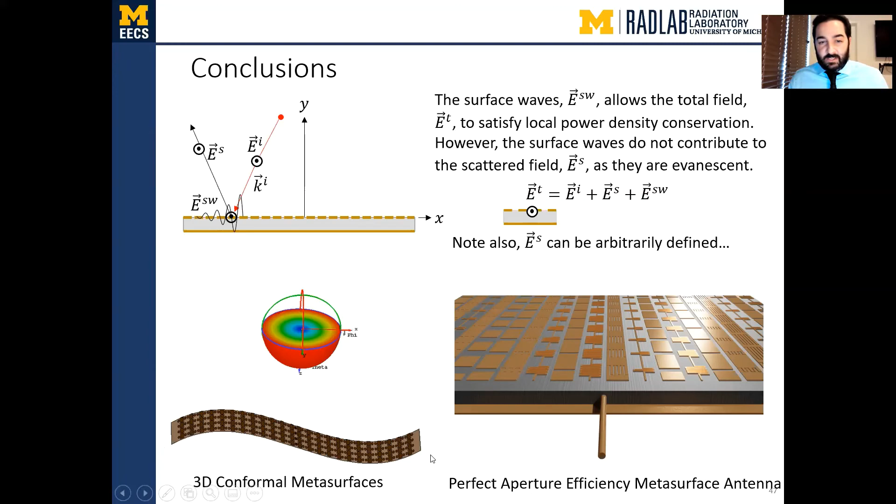Another thing we were able to do with that is get a metasurface antenna with a pin in the substrate, making all the volumetric requirements go down to zero. And then we have 3D conformal metasurfaces that we're also able to design with this, which is work we're leading into with all of this.